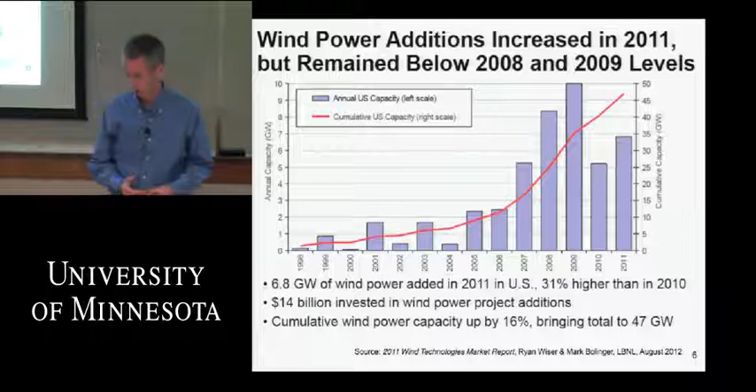In the U.S., I think you're going to hear about wind policy next week from Elizabeth Wilson, Humphrey Institute. But just a little bit on policy. There's 29 states in the U.S., including Minnesota, that have mandatory requirements for renewable energy called Renewable Portfolio Standards. Here in Minnesota, there's a requirement for all utilities to have 25% of their annual electric consumption from wind power by 2025. And there's a little bit tighter requirement on Xcel Energy, the largest utility in the state, for 30% by 2020. And the utilities in Minnesota are well on track to meet those requirements, if not exceed them.

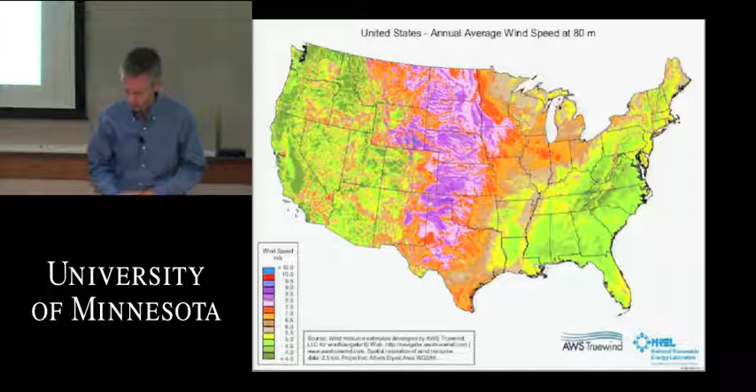in annual capacity factors. Annual capacity factors is a measure of, for a given nameplate rating of a wind turbine or rated capacity, how much annual energy are you getting out of that? So it's a measure of how strong is the wind resource, and it's also a measure of how well is that wind turbine capturing that wind resource.

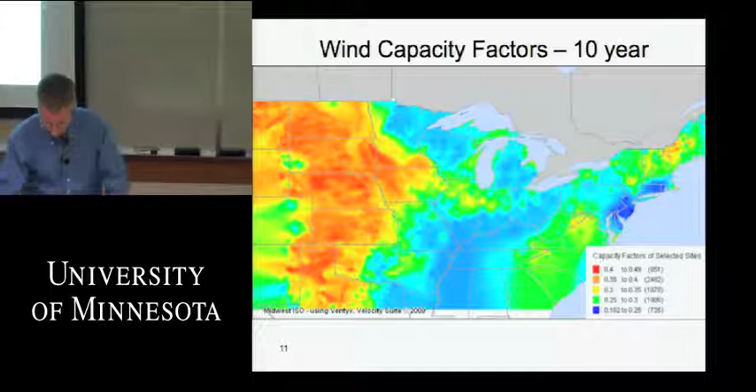It's a voluntary organization, but the utilities throughout the upper Midwest are members of this, and MISO coordinates the energy markets, day-ahead and real-time markets, transmission planning and build-out, as well as reliability. And so in this MISO footprint, upper Midwest, there's currently about 12,500 megawatts of wind operating. If you look at the requirements for wind in this footprint, by 2025, there's a requirement for about 25,000 megawatts.

And so they sound like large numbers, and a few of these states, like Minnesota, has a relatively large requirement at 25%. But when you look at the overall footprint, even when these renewable energy standards are fully implemented by 2025, it's only about 11% wind energy on an annual basis. So current wind energy installed in the upper Midwest is on the order of about 5 or 6% of annual energy. A little bit higher than that national average of about 3.5%, but just to give you a scale of some numbers.

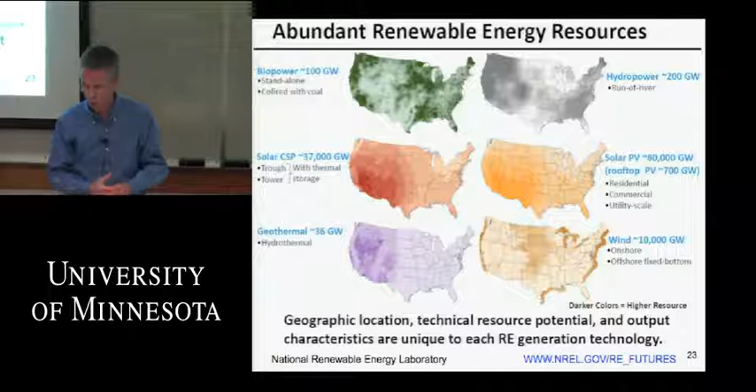And one of the things to note on these maps is that when you look at the mix of renewable energies, they're really available throughout the country. And so that was one of the findings in this study, is that not only was this kind of a high renewables mix technically possible through the analysis, but that it would drive development not just in traditional high renewable energy regions like the Midwest, but throughout the country as well.

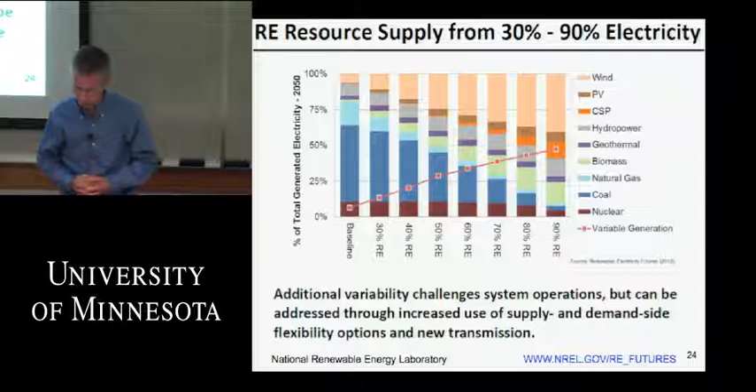This shows some of the supply mixes going from a baseline current mix on the left to the right, all the way up to 90% renewable energy. And again, this includes hydro and biomass, as well as wind and photovoltaics. It also has concentrating solar power, which is more common in the Southwest. And the focus of this analysis was on the 80% renewable energy.

Part of the results here was, again, significant carbon reductions through such a scenario, as well as significant water usage reductions. So we don't think about that much, but we're starting to see restrictions, particularly with weather extremes, in water usage and consumption. Electric power production is a high consumer of water. It's been a limited resource in the southwest part of the country for some time.

We saw just this summer, for the first time, a couple of large coal-fired power plants needing to shut down because, with drought conditions, there wasn't enough water for cooling of that power plant from the river. The water was too low. And so at the hottest time of the year, it had to close down because of water availability. So we'll hear more and more about electricity usage and water as we go forward.

Costs do increase under this scenario. The study found that they were competitive with other types of clean energy scenarios. Yes? The two reports and models that we just spoke about, what is the rate of increase in the energy consumption or energy generation from now to 2030? Yeah, that's a great question. So the question was, what are the assumptions for electricity consumption growth?

So when you look historically, in the country and in this region, we've seen 2 to 3% annual growth in electric energy consumption. We saw a big setback from 2008 to 2011 with the economy. Certainly we haven't come out of that recession yet, but we've started to. And what utilities are seeing, particularly in the Midwest, but throughout the country, is that electric energy consumption is not picking back up. So we're starting to see a decoupling from the economy, and a greater rate of efficiency throughout the sectors.

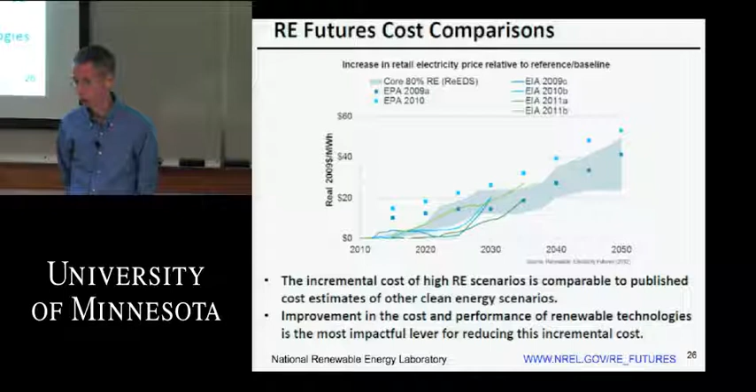So Environmental Protection Agency and Energy Information Administration, EIA, have run scenarios that include large amounts of nuclear or some types of clean coal technologies that are clean scenarios. They found this one is similar to that. There was an increase of somewhere on the order of $10 to $20 per megawatt hour by 2030. So, you know, about a penny to 2 cents a kilowatt hour increase. So again, some increase, but in line with what other studies have found.

And just overall in the study, I think the interesting and key finding is that renewable electricity generation from technologies that are commercially available today, so not assuming huge new developments in technologies, in combination with a more flexible electric grid, and I'll talk a little bit about that here shortly, that it was possible to get 80% of total U.S. electric generation from renewables in 2050. Again, you need to increase the flexibility of the power system to deal with that.

So in this 80%, somewhere on the order of about 45% was variable, wind and solar. So it wasn't all variable, but it was a pretty good chunk, 45%, found that the power system could technically balance that amount going forward.

So with that context, I want to talk a little bit about integration, wind integration, and the challenges associated with wind integration. So as I said, it's really a question of keeping the power system reliable. We need to have a real-time balance between load and generation within some statistical limits. So there's reliability standards that are set. NERC, the North American Electric Reliability Corporation, sets standards for reliability and sets the statistical limits for that balance.

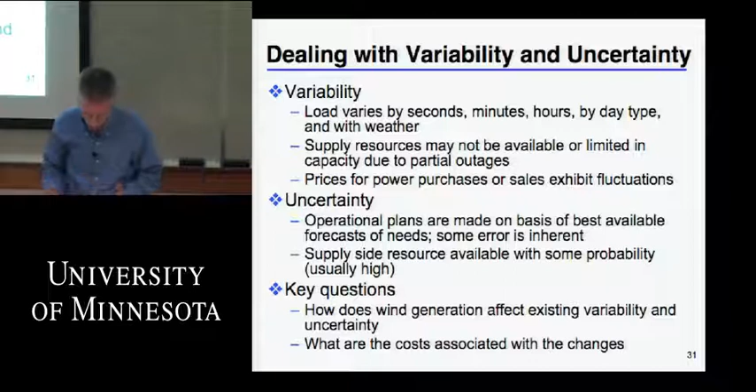We have conventional power plants, fossil plants, that while they can be dispatched with some accuracy, they do have some deviation from instructions. So you have some variation in plants being not quite where they're supposed to be. And so the power system operators have been dealing with that kind of variability always in the power system. Wind power adds some variability to it, and it's that overall net of those effects that's important to balance. So it's looking at how wind fits into that overall equation that's important.

And when you think about it, that's really out of sync with our load patterns, our consumption patterns. We tend to have higher electric consumption during the day than at night, and in the summer than winter. So that's an important factor to look at, is how wind as an energy resource actually contributes.

Yes? Do you think time of use pricing has the possibility to help even that out? Shift load from the daytime towards the nighttime? Yeah, let me get to that, because one of the things we want to avoid here is trying to make this curve look like a central power plant, because we don't need to.

So I'll talk a little bit about the overall system. There is some benefit when you look at that whole system in both rules that could shift daytime load to night, but also some emerging energy storage technologies. But just to do a quick response, at the levels of wind power we have now and in the near term, it's not really a factor, and it won't become a factor until we get much higher penetrations.

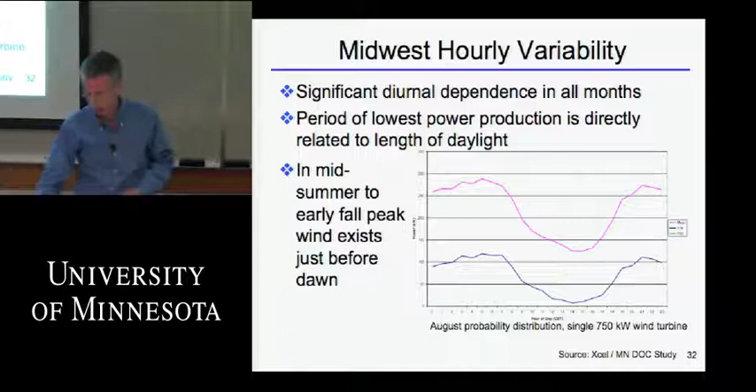They have somewhere on the order of 15 to 30 wind turbines. And the line up above is the aggregate of those wind turbines' power output. So a wind turbine, as the wind increases, will continue to increase its power output until it gets to a certain point. By design, wind turbines are designed with a high wind speed cutout. It's at about 25 meters per second wind speed, typically, about 55 miles per hour, where the wind turbine is designed to shut down and protect itself, turn into the wind, feather its blades.

It's interesting, there were wind plants that were directly in the line of Hurricane Sandy this past week that were not damaged, specifically because they have this characteristic. But it's interesting to look at because when we talk about variability, some of the most significant variability you could have is when you have a high wind speed cutout on a wind turbine. You think of the power just dropping off.

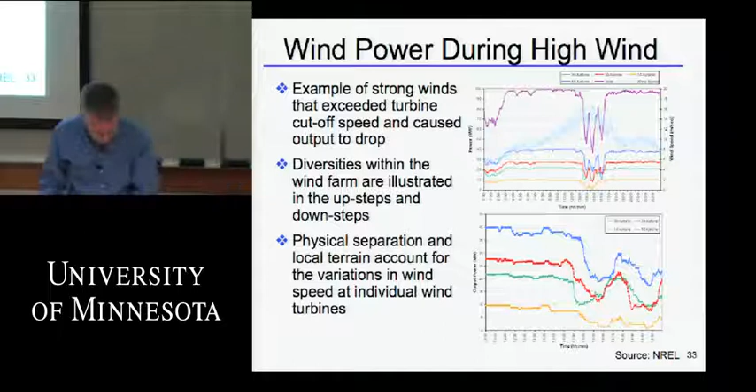What this curve shows is that even for a single wind plant, that front of weather hits the turbines throughout the wind plant at different time periods. And in aggregate, you never lose that whole wind plant output. That geographic diversity of individual wind turbines within a single wind plant is enough that you get some smoothing. And I'll show some pictures of how this diversity becomes more important as you look over a region.

And just one more look at this. This is a very specific curve from the Midwest ISO. And again, you see the states on the map there that are part of our regional power grid. You see that from east to west and north to south, we're spanning almost 1,000 miles in this grid that's operated and coordinated together. And we have wind plants all across that 1,000 miles.

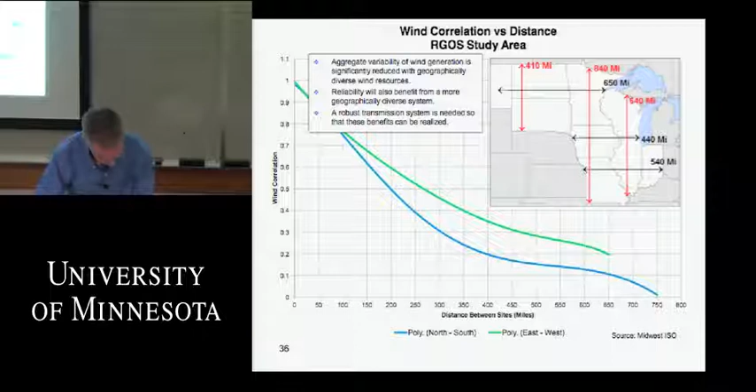I don't know, maybe Mark Ahlstrom gave you a little bit different numbers. He was in a few weeks ago. He's the best. So whatever Mark said is true. These numbers are a little generalized, but I think they were on the same magnitude.

We're trying to forecast wind, schedule conventional dispatchable generation, and have that combined meet a load forecast, both day ahead and hour ahead. And typically a day-ahead load forecast error is about 2%. It varies kind of in the 1 to 3% range. So the accuracy of forecasting on a percentage basis is more accurate for load, but of course it's a much larger amount that percentage is applied to. So the absolute amount of load forecast error in megawatts or gigawatts is larger than wind, but on a percentage basis, the load forecasting is a little bit better.

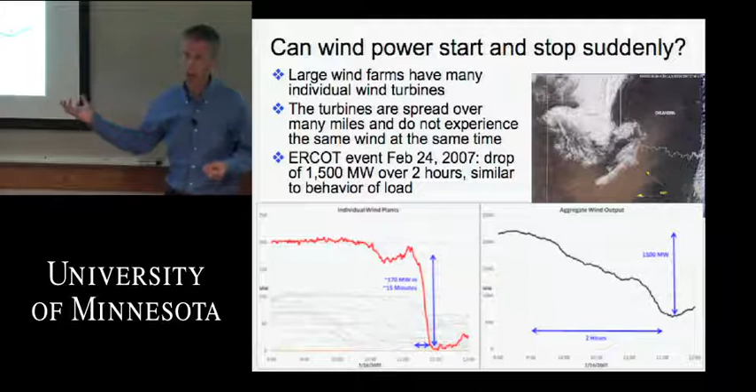And the important piece to see is that while on the sharp edge of this weather front moving through Texas, we saw extreme drop-offs in wind, and some wind plants dropped off quickly, when you looked at the whole event, there's a big chunk of power that came off. It was about 1,500 megawatts, but it came off over a 2-hour period, which is really important, and it was forecastable. So it's something that the operator can deal with and respond and plan with.

And so as a result of experiences like this and analysis that's been done, we don't have any grid operators that are considering wind as a contingency event. A contingency is, we have contingency reserves to plan for the sudden loss of an element in a power system. So you have to plan for loss of your largest power plant suddenly, or a large transmission line. But wind is kind of a different beast.

It's not considered a contingency event, except the exception is for electrical events. So if you have a transmission line which is serving a single wind plant or serving a couple of wind plants, if you lose that electrical line, you still have a contingency event. You'll lose that output suddenly, as with any generation source. But weather-driven, wind-related events are not considered contingency events. They're slower than that and impact the system differently.

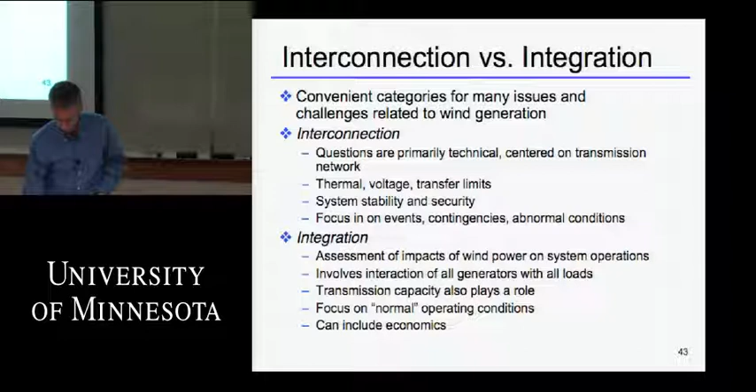So to talk a little bit about wind integration studies, I want to make some differentiation between interconnection and integration. They're a little bit of a different set of questions. So when we talk about interconnecting wind power, we're really talking about technical questions that are centered largely on the transmission network: thermal, voltage issues, transfer limits, stability, security. And that's an important area, but it's not an area that I'm going to spend a lot of time on today. I'm really looking more at integration, which is assessing the impact of wind power on operations, interaction with all the generators and loads on the system. Transmission does play a role, but it's looking at that overall operating impacts area.

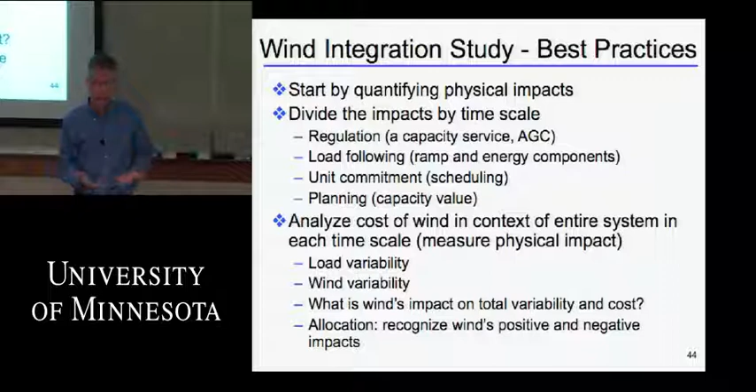So as I said, there's been a lot of study work done in this area internationally and nationally over the last decade. There's been a couple of really focused studies done here in Minnesota led by the Public Utilities Commission with Minnesota utilities. There was a large one in 2006 that led to our renewable energy standard, technical analysis and integration of wind issues. So these studies typically are focused on quantifying physical impacts of wind generation, dividing impacts by time scale, so those scales we talked about, regulation, load following, unit commitment, and planning. And then analyzing wind in the context of the entire system. So that's the key piece here, is figuring out what is the net impact of wind rather than isolating wind on its own.

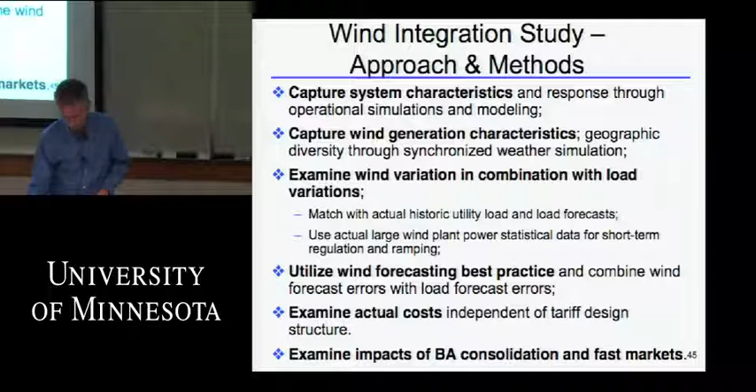It's important in these studies to capture system characteristics through modeling, as well as wind generation characteristics. So these studies can be pretty data intensive, require a large amount of detailed information about system load and generators, but also some pretty detailed models of the wind resource. And they really examine, again, the combination of wind and load and other things that are moving around. It's important to incorporate wind forecasting and wind forecast errors. So that's a key piece of the impacts, is how much is that error in wind forecast, and what does that mean? How does that have impacts on your operation and on the cost of your operation?

We talked already about these time scales. Regulation is seconds to minutes. It's the cycle of what's called AGC, or automatic generation control, that keeps that real-time balance and keeps the frequency at 60 hertz. Load following, tens of minutes to a few hours. Scheduling and commitment is that day-ahead time frame of planning generation for the next day. And then capacity value. While wind generation is primarily an energy resource, to what degree does it contribute to long-term reliability? To what degree can you technically and analytically count on it to meet peak demand? There's some portion of wind power which you can rightfully, through calculation, attribute to capacity value, and so that's an important time frame as well.

Operating reserves are really where we see this wind integration impact coming to play. So this is a NERC definition, a North American Electric Reliability Corporation definition. Operating reserves are that capability above firm system demand required to provide regulation, load forecast error, in this case load and wind forecast error, combined forecast error, equipment forced and scheduled outage, local protection.

So we carry operating reserves on the system to ensure reliability. So we make sure that we carry generation above and beyond what is actually needed to meet peak demand in order to meet these categories. In the U.S., we combine spinning and supplemental reserves into contingency reserves.

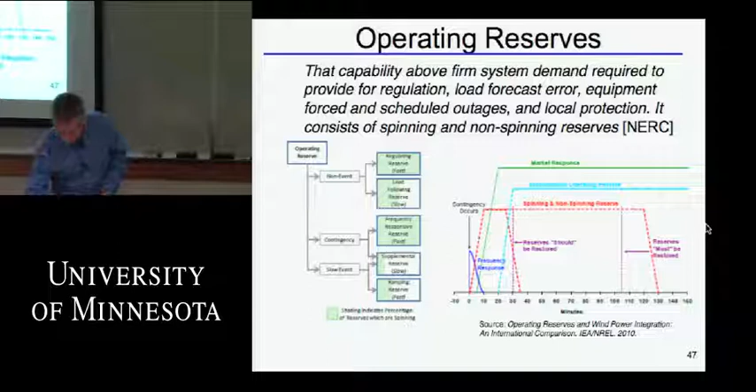And so when we're looking at variability of wind power and the net impact on the power system, we're often looking ultimately at how does it affect these reserves, and then what is the cost of that effect? What is the cost of integrating that wind power due to the impact on reserves? You see this question all the time, does wind power need backup generation?

So total load must be met by a combination of generation. And we're not backing up any individual generator on the system. So any large conventional plant, a large coal plant has a high degree of reliability, but it's not perfect. It has a forced outage rate typically on the order of 5-6%, depending on age. It could be older, it could be larger than that. You can lose that plant suddenly, but we don't back up those individual plants.

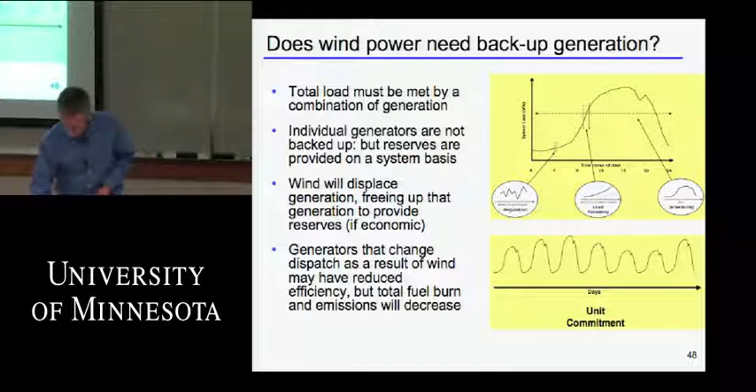We rely on the whole system and look at the reliability of the whole system. And wind power fits into that overall system. So it does not require backup. Analysis has shown that. But it does have some incremental impact on reserves. It does require a small amount of increased reserves, as do other generators on the system.

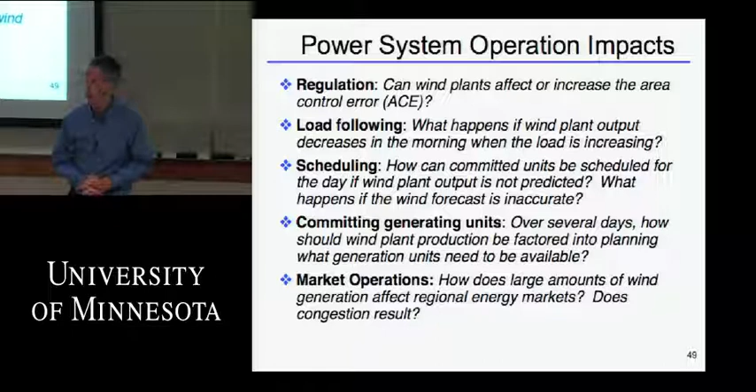And then we can look at operating impacts in these other areas: regulation, load following, scheduling, commitment, as well as market operations. And I'm going to talk a little bit about each one of those categories in a little bit more detail. So when we look at the operation of the power system, we can do a decomposition of loads into these time frames.

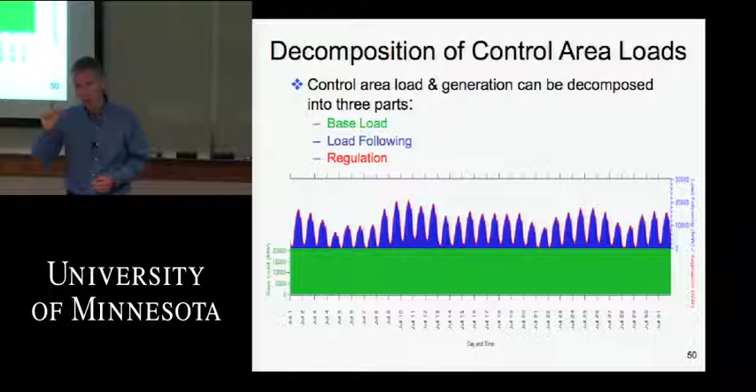The green, so this is over time, the electric power consumption. This is over a single month. Each one of these peaks is a day, and so that large green base is base load generation, and then the blue is load following, and then that small line on top is that regulation that's needing to vary very quickly to keep things in balance.

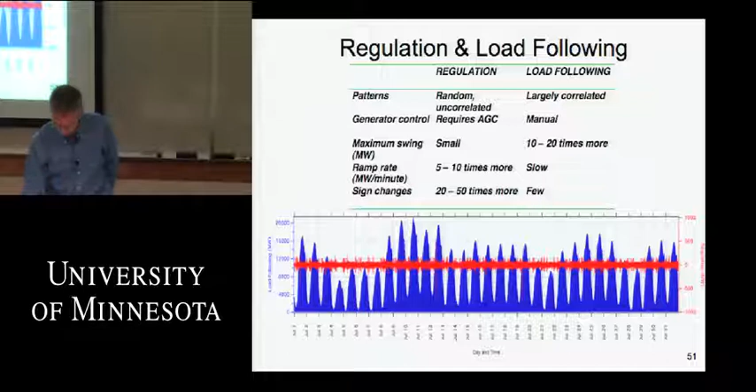And there's a lot of contrast between regulation and load following and what characteristics we need from resources to do that. Regulation tends to be random and uncorrelated. It's not really a consumer of energy. It's got positive and negative deviations to keep the frequency at 60 hertz. And so we want to look at impacts on both of these.

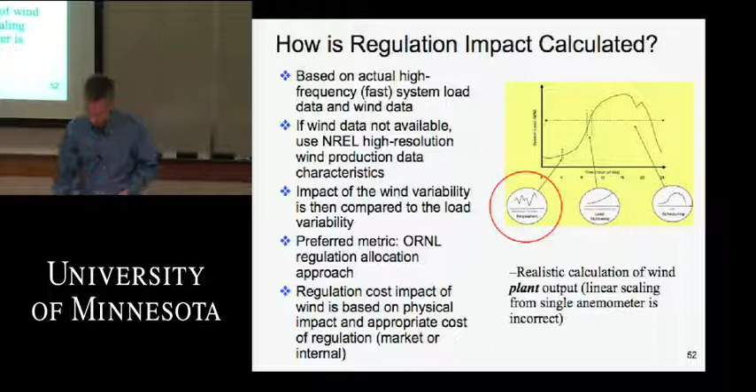So we look at wind power in these wind integration studies. We look at its impact on each of these categories and each of these time frames. And to calculate regulation impact, we use actual high-frequency data, load data, as well as actual wind data, and look at how those characteristics combine.

The general findings have been that even with large amounts of wind power, this slide says 15%, but studies have been looking up at 25, 30 or more percent wind power, very small impact on regulation. And the reason for that, again, is what we talked about previously about geographic diversity. So in that regulation time frame of the seconds and minutes, wind power that's distributed over hundreds of miles is aggregating and smoothing itself in that regulation time frame. So we don't see an impact on regulating reserves.

The other piece is that the load variations in that same time frame, all of us turning our lights on and off, or factories turning motors or machines on and off, that kind of variation in the fast time frame is uncorrelated with the wind variations. You think about it, they're different systems, different characteristics. So as you combine those together, you get a smoothing as well.

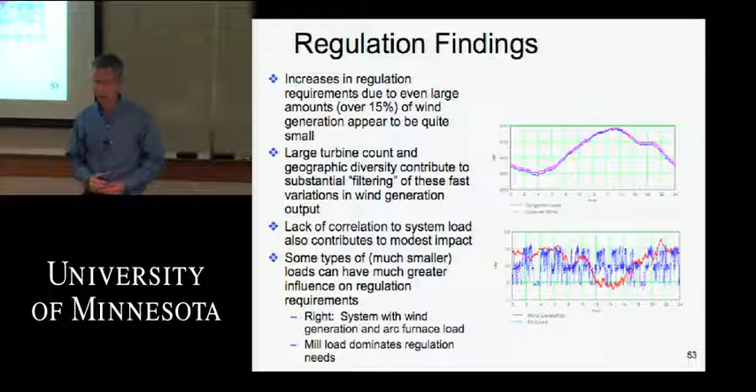This is important because when you look at the operating reserves, this regulation reserve tends to be the more expensive reserve on the system. So if we were impacting this, we would see cost impacts of some significance. But the finding is very minimal impacts from integrating large amounts of wind in regulation. And as I noted from my earlier slide, our grid operator confirms that they're just not seeing much impact in this time frame.

Let's move on to the load following time frame. It's interesting to look at what we call the balancing area, the region. So historically, we had individual utilities. They were called control areas, and the terminology we now use is balancing authorities, and they had to meet the NERC reliability standards on an individual utility basis. But we've since functionally aggregated. So not only is MISO, the independent system operator, planning and dispatching the system across the upper Midwest, but the reliability standards that must be met are being functionally aggregated.

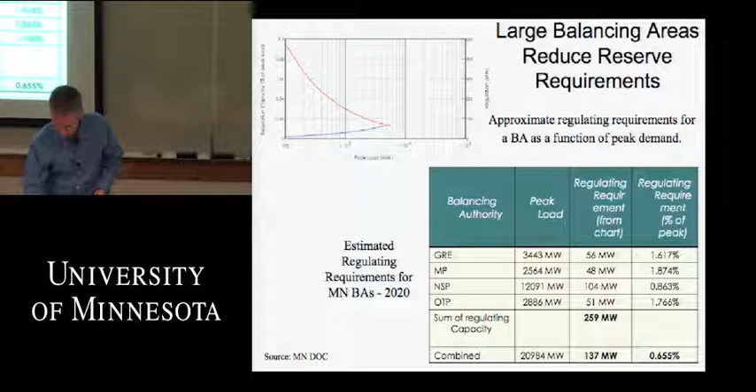And independent of wind or renewables, it's just a recognition of this aggregation benefit that reserve requirements go down when you aggregate more load over a larger area. And so that's a big benefit to the power system as a whole, but also for integrating wind.

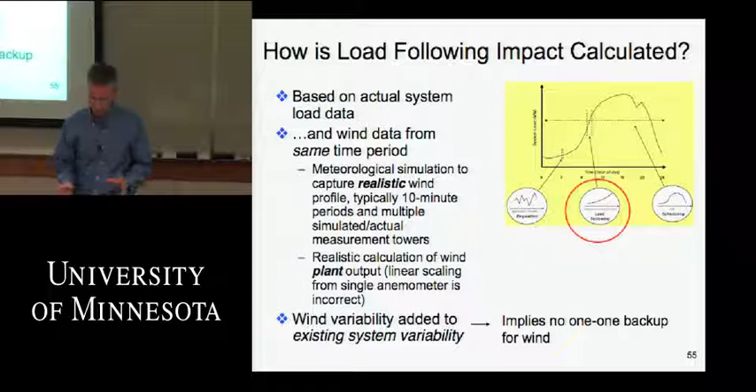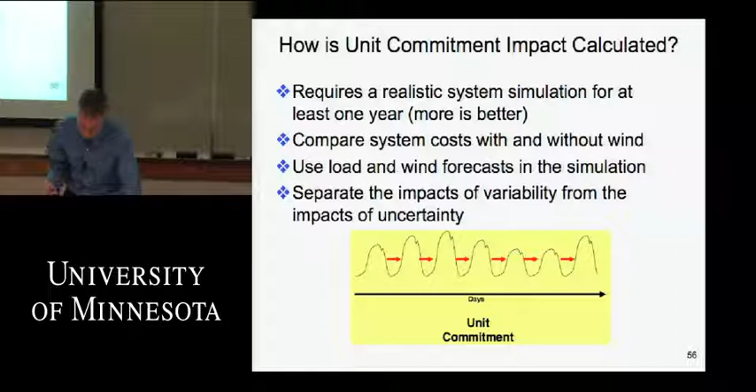Load following, again, based on actual load data, wind data from the same period, adding wind in to look at existing variability. And in those same types of models, we're looking at unit commitment. So typically we're running production cost models that simulate the security-constrained economic dispatch of the system and the commitment of resources, and stepping those models through multiple years and layering the wind in over top of it.

And then day-ahead issues. Part of that modeling and process has really shown the value of forecasting and the importance of scheduling wind in the day ahead. So when we got up to thousands of megawatts, we're now at almost 13,000 megawatts of wind in the upper Midwest, it became really clear that it was important to incorporate that wind, through the day-ahead wind forecast, in the scheduling for the next day, to not have it just show up, because that could be a pretty significant impact. But again, the forecasts have been relatively good, and so that scheduling has integrated well.

And towards the end here today, I'm going to talk about some of the overall results and findings of these studies in aggregate. But again, the costs have been shown to be relatively small for integrating wind, on the order of $5 to $10 per megawatt hour of wind energy, about half a cent to a cent maximum, to handle these additional operating reserves. It's largely come from the balancing and load following time frame and some unit commitment and scheduling.

Do you see any uniform switch in the costs when you're comparing regulated and deregulated electricity markets? Not so much regulated or deregulated, but what you do see is a big difference between regions that have an ISO that's running a fast energy market, 5 to 15 minutes, versus regions that don't have an ISO and are doing hourly scheduling. So that's a little different than regulated or deregulated, where in a deregulated market, people can go anywhere to buy their retail energy. That's not as much an issue of integration as the time frame of the energy market.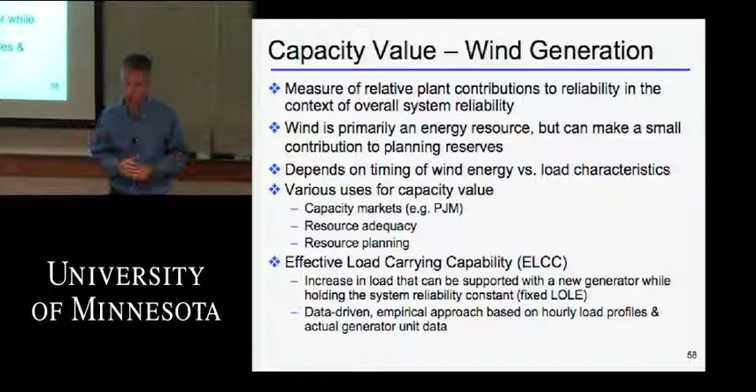And so even though wind is an energy resource, it's variable. With sufficient wind data, multiple years of data, you can fit this, and it has been shown to be analytically correct to fit it into these standard reliability models. And through the ELCC can look at capacity valuation.

Throughout the country, this is a NERC slide, and this is actually a few years old. Again, North American Electric Reliability Corporation, which sets our reliability standards, has found capacity value to vary from 10 to 20, and actually currently it's ranging up to 30% of nameplate. So it's saying that it's a fraction of that wind plant, which again can be attributed to long-term resource adequacy. And it varies around the country because it's pretty dependent on both the wind characteristic and the load characteristic in a particular part of the country.

So when we look at this effective load carrying capability and we look at wind capacity value, what we're really saying is on a rigorous analytical basis, what is the history, multi-year history of wind being available at the high-risk hours? And in the Midwest, where summer peaking, high-risk hours typically means a hot summer afternoon, those hours 2 to 4 o'clock, 2 to 5 o'clock, where it's peak load.

But the importance of this reliability metric is it looks throughout the year. And so in spring or fall, when large conventional generators are taken off for maintenance, you can have some high-risk hours. You can have some high-risk hours around that peak summer hour. So it's more than just meeting the one peak hour load. And again, it's a metric that's developed for all generation that we fit wind in. It's not a special metric for wind. And so it depends on the wind resource in a particular part of a country, of how it matches in.

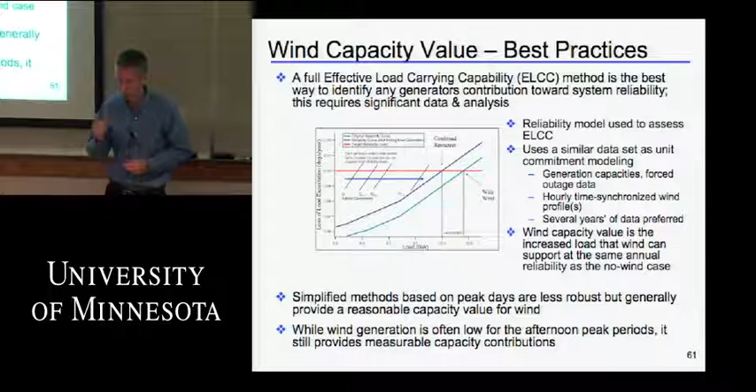This shifts a little bit with wind resources, and one of the interesting things about the development of offshore wind, we're starting to see more proposals for offshore wind off the East Coast, is that the characteristic of wind that I talked about earlier is quite a bit different over water. And so over the ocean, and frankly over the Great Lakes as well, because of the difference in surface roughness and the way that the weather patterns develop, you see a higher wind resource in the afternoon than at night. And so when you run these reliability metrics on offshore wind, you come up with capacity values of somewhere around 40 or 45% of nameplate. So it's important to look at the particular resource, and it's an added value of this concept of developing offshore wind.

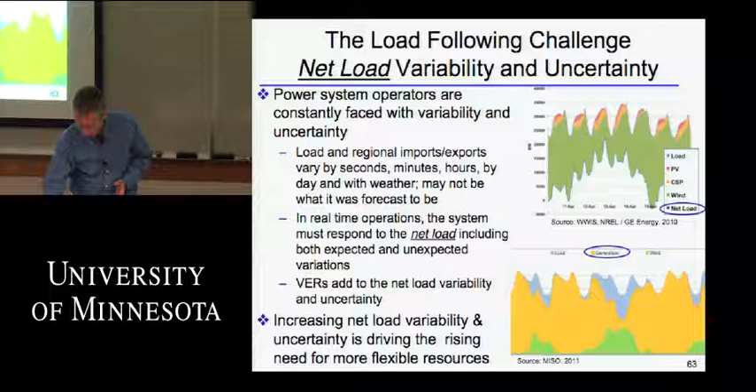And when we look at this, again, we're really interested in net load variability and uncertainty. So net of variable wind generation and load, and what is that resultant, and how does that need to be balanced? And so it's this net load that's important, and it's really driving when you look at where we are with wind generation, and more importantly, where we're headed as you get up towards higher penetrations of wind on a system, on a regional grid, 15, 20%, 30% plus. We really anticipate a need for greater power system flexibility.

And when we talk about power system flexibility, we're really talking about the ability to increase or decrease supply or demand in response to fluctuations in either supply or demand, and fluctuations whether they're expected and planned or whether they're unexpected, whether they're contingency events. And we need it in various time frames. We need the ability to ramp up and down over time.

We were just talking a moment ago about institutional flexibility. So there's a certain amount of flexibility that's inherent in how the power operation rules are structured, whether there's fast energy markets, redispatching the system every 5 minutes as we have in the Midwest, or whether it's hourly scheduling in the Northwest. In the Northwest, there's a lot of wind power now in the Bonneville Power Administration system, Oregon, Washington, and the hourly scheduling has become a large problem. So they're looking at easing their wind integration by developing sub-hourly scheduling protocols.

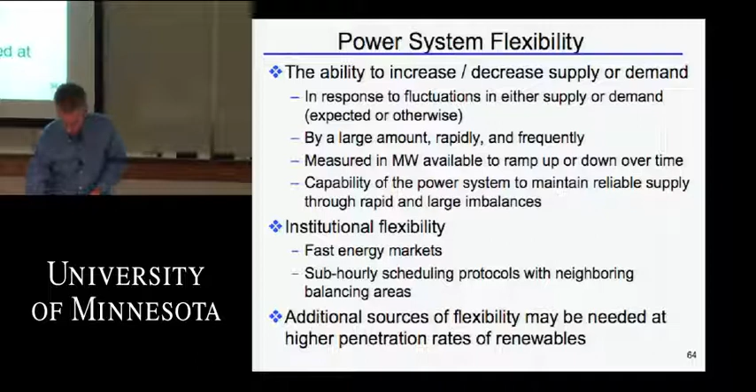And there are other sources of flexibility as we get to higher penetration. So this is a flexibility supply curve, very simple, put together by National Renewable Energy Lab, but demonstrates that when we look at power system flexibility, we're looking at both supply and demand side. So typically when we think about flexibility, we think about generators. We think about natural gas combustion turbines. Those are very flexible. You can start them up, ramp them up or down. And those are important, but there are other sources of flexibility, other sources of flexible generation, and importantly, there's demand side flexibility.

So we're starting to see more and more use of what's called demand response, of having customers, either large individual customers or aggregate customers, participate in the market and be able to bid in reductions in their demand in a similar way that people bid in generation to be able to balance the system out. And this has been particularly enabled by new technologies, power electronics, monitoring and controls and communications, as well as technologies of the grid to be able to link those two together.

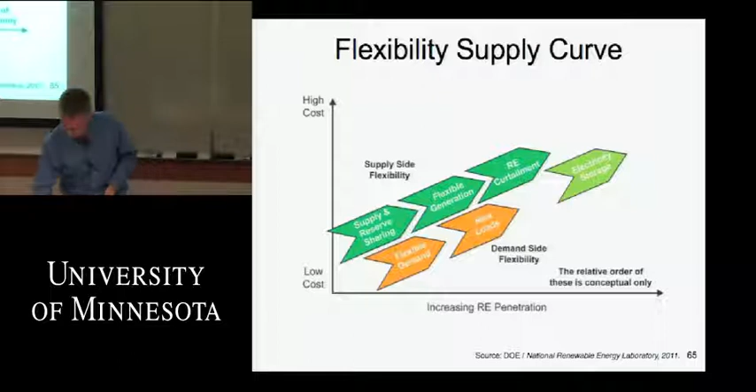So yeah, we were talking on the break a little bit about smart grid development and of an intelligent grid and a grid that has a better communication system and better control system. So both demand response and smart grids can support deployment of variable energy resources, variable generation, and these will become more and more important as we move forward and get greater penetrations of variable generation on the system.

You hear a lot about storage these days, and we'll hear more about storage as we go forward. You know, I think you folks know well that electricity is kind of the ultimate real-time product. We don't have a good way in volume to store electricity. We have some pumped hydro storage where water is pumped up to a reservoir at a higher elevation at night and released down through a turbine during the day. There's been some talk about development of compressed air energy storage, where you compress air in caverns underground and then can release that through turbines during the day.

But there are other technologies of storage that are under development, currently relatively expensive technologies. And the important thing to realize here, we talked towards the beginning of the discussion about moving daytime demand to night. And so storage is one way to do that, in addition to some incentives through tariffs or rates. But it's expensive, and so we want to make sure that we're looking at it in the right context. And when we look at the whole body of literature that's been done on wind integration studies, even up to 30% wind energy penetrations, we haven't seen a technical requirement for storage.

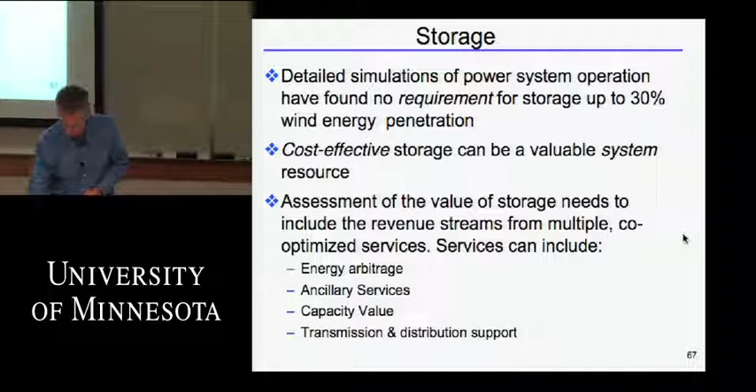So we're in the early stages of development of cost-effective storage technologies, but we see over the coming decade or two that this will have a growing role in the system, and will be part of a flexible system as well.

So I have a couple of slides about some work that was done by IEA, the International Energy Agency. And it's pretty interesting looking at this balancing challenge, looking at integration of large amounts of variable renewable generation, and how do you look at the flexibility of a power system in dealing with that. So as we look at the components here, this is just showing the main factors that need to be taken into account when assessing flexibility.

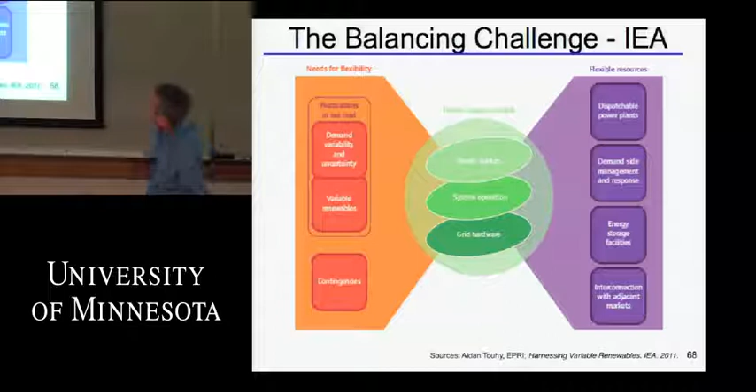And on the left of this, we see needs of flexibility. So demand variability and uncertainty, and variable renewables. Those two together, as we've been talking about, make up net load. And we also have contingencies, things like sudden outages of power plants or transmission. Those are a combined need for flexibility. And on the right, we see sources of flexible resources.

So certainly dispatchable power plants like natural gas combustion turbines or combined cycle plants are sources of flexibility. But also demand-side management we were just talking about, energy storage, but also interconnection, both within a grid and to neighboring grids, is a source of flexibility.

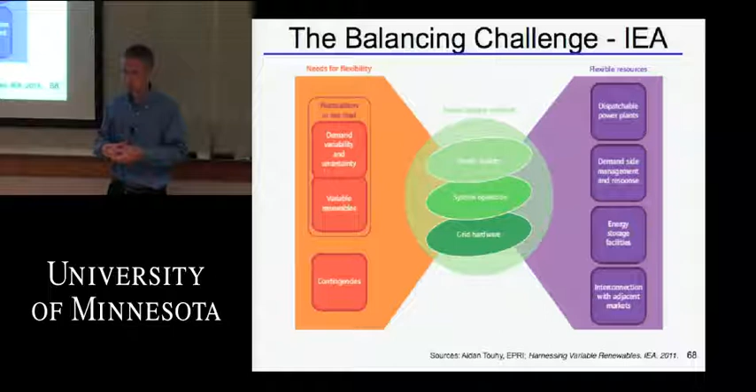So that's kind of a relatively new concept, to think of the grid itself, the actual transmission, and the robustness of that transmission as a source of flexibility. And when we see grids that can handle large amounts of variable generation, a key component of that is their ability to aggregate both within their footprint, but with neighbors adjacent to their footprint.

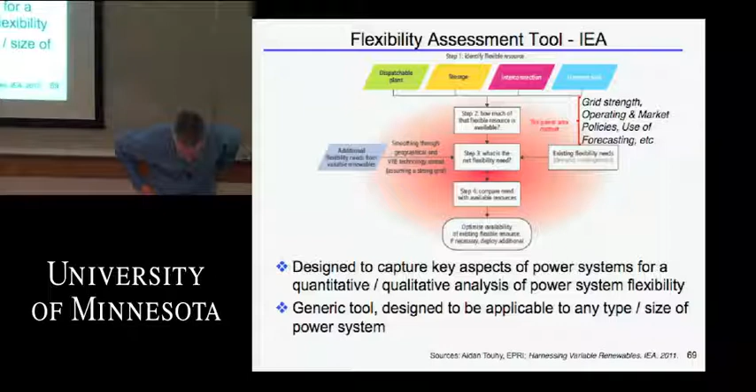So IEA, again, the International Energy Agency, has developed a relatively simple flexibility assessment tool that first looks across the top at these four categories of flexible resources and looks at assessing the max technical capability. So in the resources, what's physically there as far as flexibility, and then in the second step here captures the extent to which certain attributes of the power system will constrain the availability of that flexibility.

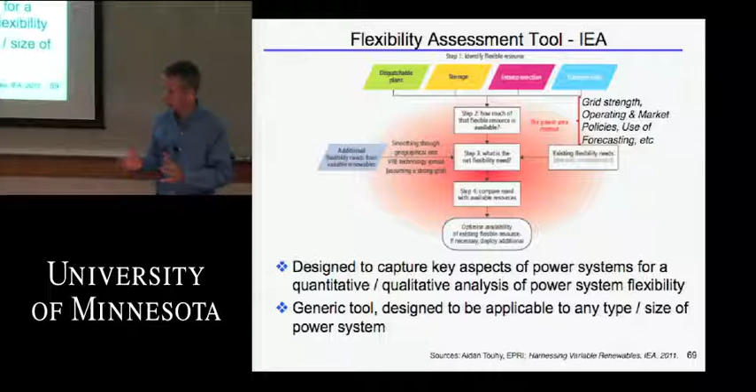So things like grid strength, operating or market rules, and the use of forecasting. Those are all things that could either enable accessing system flexibility or constrain that flexibility. The third step is, again, looking at this net load. What is the need of flexibility, variable generation, variable load, and then combining those together to get some assessment of relative amounts of variable generation that could be handled.

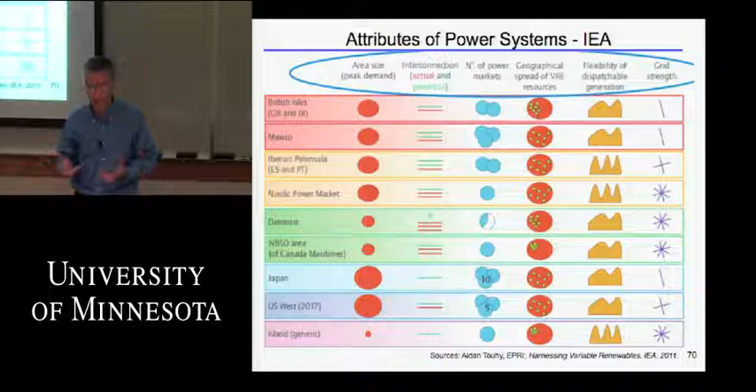And so when you look at those two systems going forward, you see Denmark and Japan falling on the bookends here, where Denmark is positioned to integrate large percentages of renewable energy because of those flexibility attributes. And Japan, in a relative sense, again, this is just a high-level coarse assessment, relatively less. And so it just gives you a sense of those varying components, both physical and market rules, that are important in looking at both flexibility and the ability to integrate renewables.

So overall, key factors that influence wind integration impacts and costs. Certainly the level of wind penetration is important. Whether you have 10% wind energy or 30% is going to impact the cost of that integration. Balancing area size, so the area over which you're trying to meet those reliability statistics and balance the system in a seconds, minutes, tens of minutes, hours time frame is important, as well as the conventional generation within that mix, within that balancing area, and how much load aggregation benefit you get from that balancing area size.

Wind resource geographic diversity is important. Time period for scheduling and dispatch we've talked about. So is that system being both scheduled and dispatched in a relatively short time frame, 5, 10 minutes, 15 minutes at the most, or is it on an older, coarser system, hourly scheduling, like some parts of the country? Market-based or self-provided ancillary services, so these additional services that are needed to support the grid, are there markets available for those? Are reserves available through markets? Are there liquid markets to provide those, or are those more ad hoc? And then size of interconnected electricity markets.

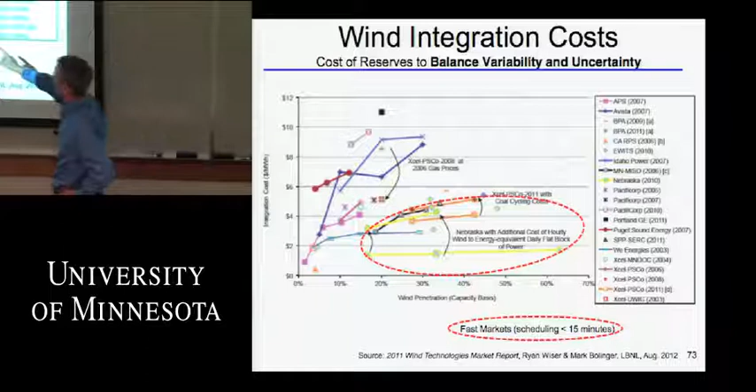I wanted to show a couple of graphs of wind integration study cost results. So over the last 5 years, there's been a couple dozen studies done that take a detailed analytical look at these wind integration issues I've been talking about. And across the x-axis here, we see wind penetration. This is on a capacity basis, but you see it ranging all the way up to 60%. Most of these studies are in the range of 10 to 30% wind penetration on a capacity basis. And on the y-axis, you see integration costs, and this is in dollars per megawatt hour of wind. So when you see an upper bound around $10 per megawatt hour, that's something like a penny a kilowatt hour. And it's really the cost of the additional reserves needed for the variability and uncertainty of the wind generation.

And what I've highlighted here is those studies that were done in fast energy markets. So you see those areas with energy markets like the Midwest ISO, both studying higher penetrations but lower costs. So you see these integration costs coming in on the order of $2 to $4, certainly under $5 a megawatt hour, under half a cent per kilowatt hour in those areas. And even in the other markets, you see it ranging maybe up to $10 a megawatt hour. But in both cases, pretty manageable costs.

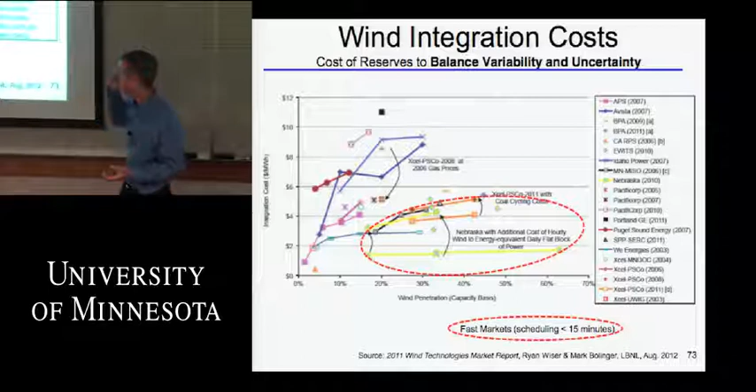Another way to look at this separates out on the left those studies that are in hourly scheduling or areas without fast energy markets, and on the right are the fast energy markets. And this is showing the increase in reserves that's needed. So in this case of fast energy markets, we're seeing something on the order of 5 to 10% additional reserves needed. So it's not zero. There is impact for sure, but it's a manageable impact. And it's relatively well understood in these areas that have been studied.

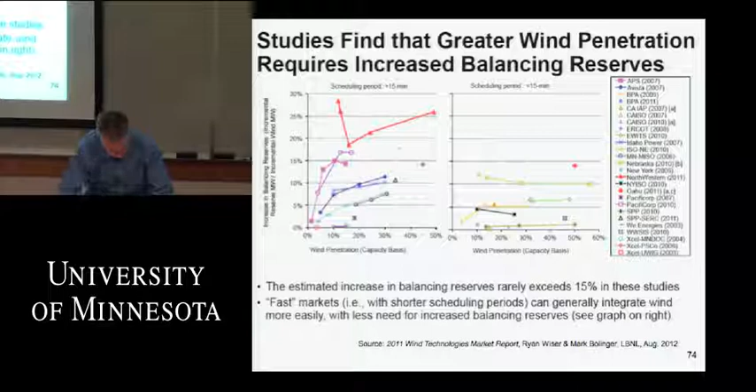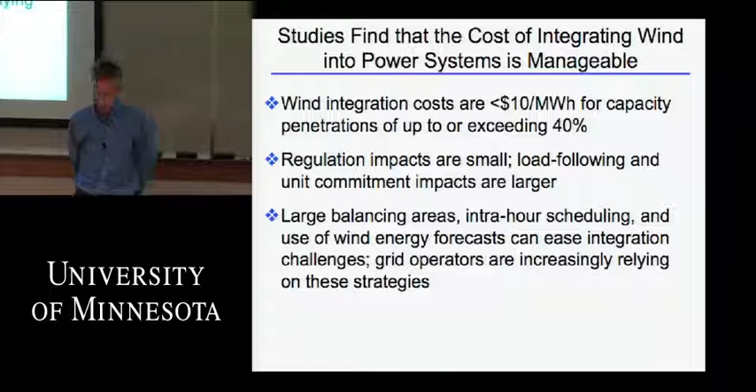So again, the studies are showing that wind integration costs certainly less than $10 a megawatt hour and less than $5 a megawatt hour in many markets. Regulation impacts are small, a little bit larger impacts in load following and unit commitment timeframes. Large balancing areas, intra-hour scheduling, and use of wind forecasts can all ease integration challenges.

And so I just want to finish with a couple of slides of summary, one on wind integration, one on flexibility, and then an overall one on integration of renewable energy. So as we look at this in whole, having large amounts of variable wind generation is relatively new.

Our grids throughout this country and really throughout the world were originally designed around traditional forms of generation. They were designed around fossil fuels, nuclear, hydro. But variability and uncertainty have always been characteristics of those power systems. They've always had to be managed. This isn't a new thing with wind generation, it's just an incremental additional amount. Wind and solar are variable and uncertain, and they do have impacts to the power system over varying time frames.

These impacts are significantly reduced with large liquid fast markets, large balancing areas with a strong grid, and so that's a critical component, to have a strong and robust transmission system, both within the grid footprint, the market footprint, but also with neighbors. And forecasting of wind generation significantly reduces the uncertainty piece of the variability and uncertainty.

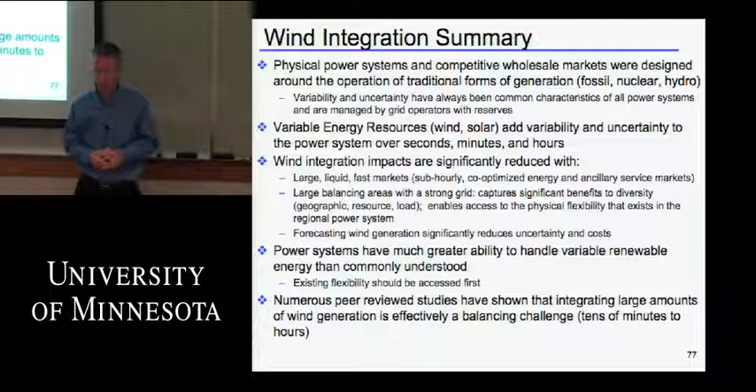We value energy, we value capacity, we value ancillary services, but the ability of a generator to move, to ramp a certain megawatt per minute over a certain time frame, is something that we need to start thinking about more explicitly. And we're seeing market structures starting to explicitly recognize that.

Flexibility will be more and more a key and central concept in designing, developing and evolving our power system. And as we talked about, there are multiple sources of flexibility: dispatchable power plants, demand-side resources, grid interconnections, storage. And we not only need that flexibility, but we need to be able to access it. We need to make sure that we have the market structures in place so that what's available is actually accessed and implemented.

Key power system characteristics which affect how much of that technical flexibility we use include grid strength, market size, scheduling, dispatch, use of forecasting, and value of flexibility in the marketplace. As I said, market rules are starting to evolve, not just scheduling and dispatch, but market rules around ancillary services. I just mentioned load following, ramp management. And we're increasingly seeing markets where they're actually dispatching variable renewable generation. So wind generation is becoming part of the dispatch in the market rules, and that's a relatively new concept as well.